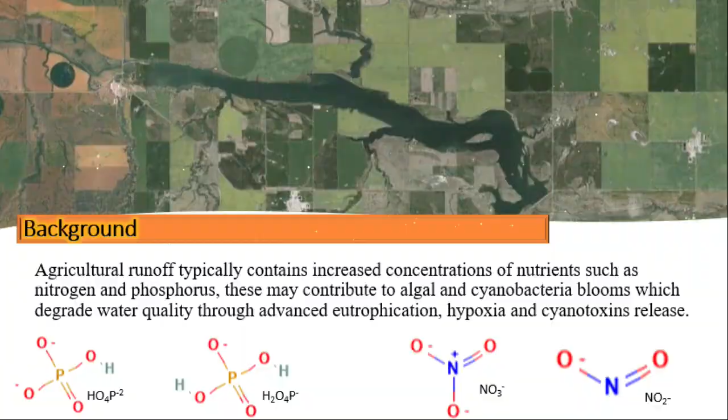A watershed that has been negatively affected by nutrient contributions includes the Gulf of Mexico Dead Zone, which is an area of hypoxic waters at the mouth of the Mississippi River. Its area varies in size, but it can cover up to 6,000 to 7,000 square miles. It occurs between the inner and mid-continental shelf in the northern Gulf of Mexico, beginning at the Mississippi River Delta and extending westward into the upper Texas coast.

It's the largest dead zone ever recorded, and I know you're all asking, how does this relate to me? I'm a farmer, or I live in the city in southern Alberta. Why is this relevant? Oh, please stay tuned.

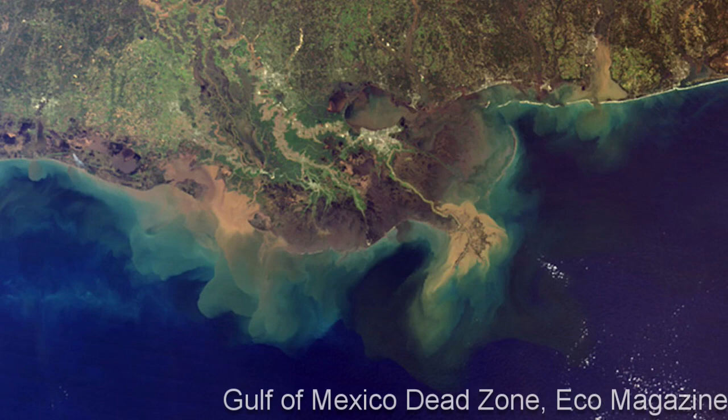Getting closer to Canada, Lake Erie is another example of a watershed that has been negatively affected by nutrient contributions. In Lake Erie, in 2014, toxic algal blooms resulted in fouled water that hundreds of thousands of people rely on for drinking, cooking, and bathing, forcing hundreds of thousands of people to rely on bottled water. Blue-green algae, or cyanobacteria, choke up huge portions of the lake and have re-emerged as an annual summertime problem after nearly disappearing for more than a decade.

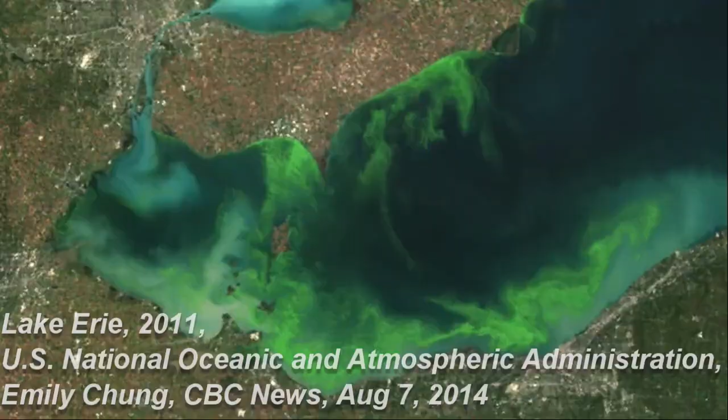And although the size of the bloom varies from year to year, in 2014, the bloom was nothing compared to the 2011 record breaker that took over a whopping 5,000 square kilometers of the lake. There is clearly a trend towards larger blooms. And I know what you're thinking, sure, that's in Canada, but that's a long ways from my farm or community in southern Alberta. How is that relevant to me?

And this is but one example of many within Alberta, as many of the reservoirs in southern Alberta are eutrophic systems. These are rich in dissolved nutrients that stimulate the growth of aquatic plant life. And decomposition of that plant life results in the depletion of dissolved oxygen, resulting in hypoxia. Some of the reservoirs can at warmer times of the year experience blooms of blue-green algae, also known as cyanobacteria.

The cyanobacteria is a naturally occurring bacterium that is found within many water bodies throughout the world. During periods of increased temperatures, large populations can develop, which release a toxin, the cyanotoxin microcystin, that can result in death by respiratory system failure or liver cirrhosis and failure. While this bloom dissipated days later, it is important that if you notice blooms of this bacteria within water bodies and water sources such as springs and water troughs, that you prevent animals and livestock from entering or consuming the water and clean out that water source.

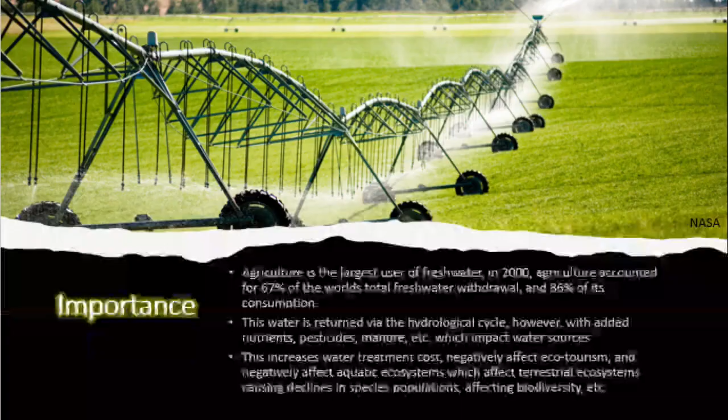It comes as no surprise that agriculture depends on fresh water. It's the largest use of fresh water in the world. In 2000, agriculture accounted for 67% of the world's total freshwater withdrawal and 86% of its consumption. This water is of course returned via the hydrological cycle, however, with added nutrients, pesticides, manure, and other pollutants, which impact water sources. This increases water treatment cost, negatively affects ecotourism and negatively affects the aquatic ecosystems, which affect terrestrial ecosystems as well, resulting in declines in species populations, affecting biodiversity, and many other effects.

There's many different beneficial management practices that can be implemented to control nutrient contributions to downstream watersheds. These include conservation tillage, crop nutrient management, pest management, conservation buffers, irrigation management, grazing management, animal feeding operations management, and erosion and sediment controls.

I know what you're thinking. I'm just a farmer or a rancher, or I own a golf course in Alberta. I don't have a lot of money to invest in new technology. And why should I spend a bunch of money to solve problems thousands of kilometers away from me? What can I do on a farm level to mitigate problems closer to me? Throughout this presentation today, I'll be discussing the phosphorus filter, which fits loosely into the animal feeding operations management and erosion and sediment control areas.

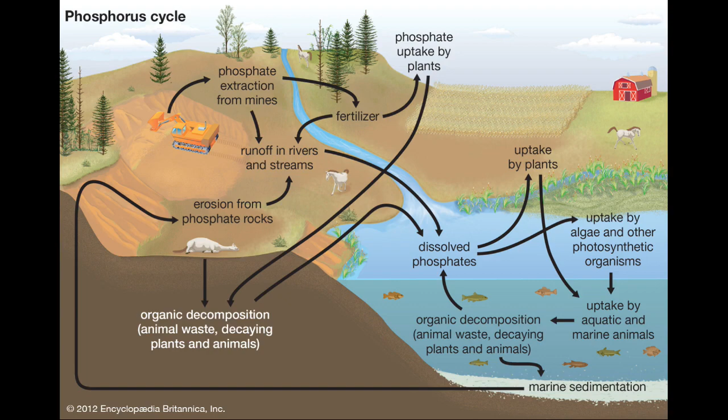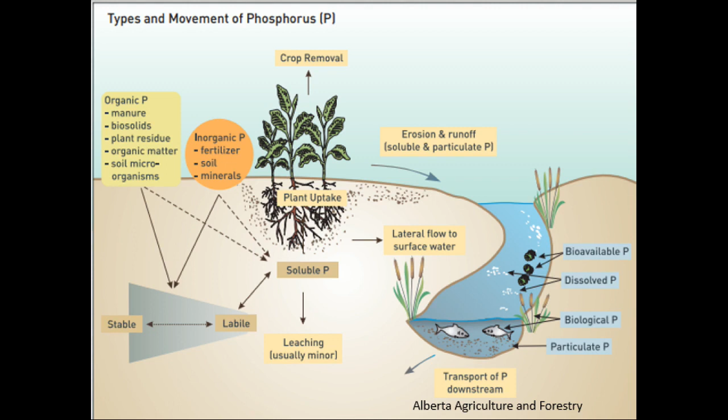In soil, not all phosphorus is the same. It can be either organic or inorganic molecules. In addition, the molecules that contain phosphorus will change in the soil through nutrient cycling. Phosphorus inputs into the soil for agricultural purposes are primarily from the application of chemical fertilizer and organic sources, such as manure. Soil phosphorus is categorized into three types: soluble phosphorus, labile phosphorus, and stable phosphorus. Throughout the presentation today, I'll be discussing the soluble phosphorus phase. Soluble phosphorus is a very small part of the total soil phosphorus, but it's a fraction taken up by plants. It can enter the surface water bodies and is biologically available and can rapidly stimulate aquatic growth.

Phosphorus moves from the landscape attached to the soil particles carried by wind or water and in dissolved forms carried by surface water runoff. Particulate phosphorus refers to all forms of phosphorus sorbed by soil particles and organic matter. Dissolved phosphorus, or DP, refers to the form of phosphorus dissolved in the surface runoff. Once mobile, phosphorus can be redeposited elsewhere on the landscape or be carried to surface water, potentially degrading water quality.

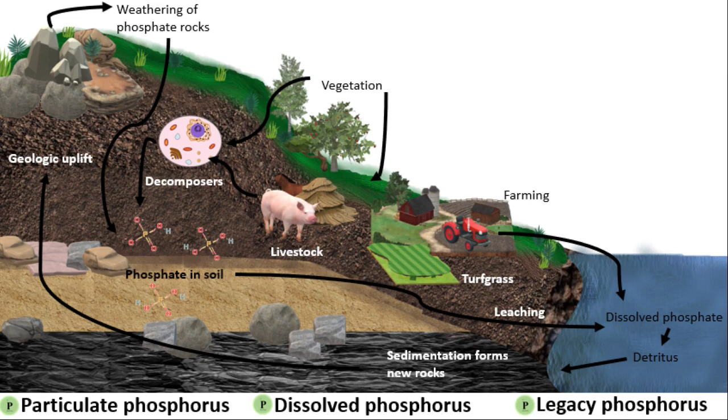Surface water runoff can transport nutrients such as phosphorus and nitrogen from livestock manure and fertilized agricultural fields into freshwater bodies. Oklahoma State University researchers have been developing phosphorus filters to effectively remove dissolved phosphorus from surface water runoff. In Alberta, most of the phosphorus is in the dissolved form, which is readily available to algae and aquatic plants, which can result in algal blooms and excessive plant growth, which both cause deterioration of water quality.

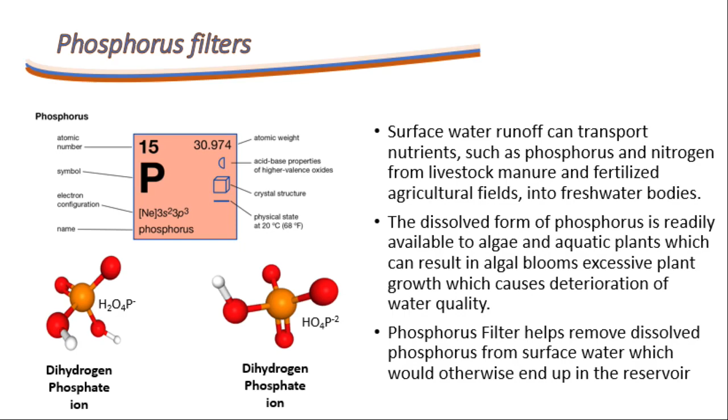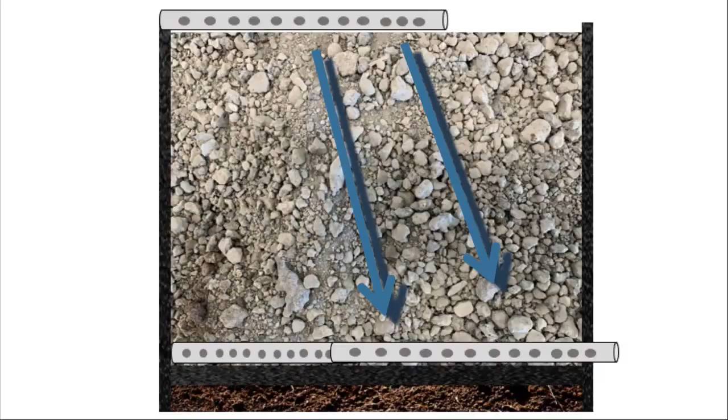The phosphorus filters are designed to use industrial byproducts such as fly ash, steel slag, red shale, and other synthetic materials such as biomass. These can be used as a filter media to capture and hold the dissolved phosphorus, thus preventing it from moving into the water body. Within the filter structure, the runoff wastewater is introduced to the filter media through perforated PVC pipes. The water flows down through the media, and the PSM binds the dissolved phosphorus, thus reducing the concentration in the water. The water flows out of the perforated PVC pipe and out of the filter system. It is important to have the filter system drain into an area that is resistant to soil erosion, such as a vegetated buffer.

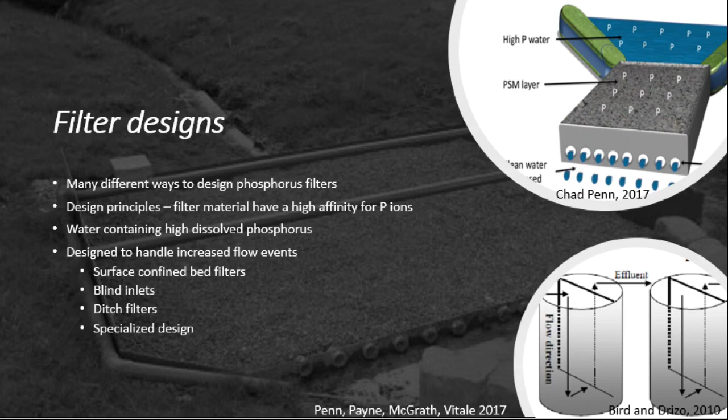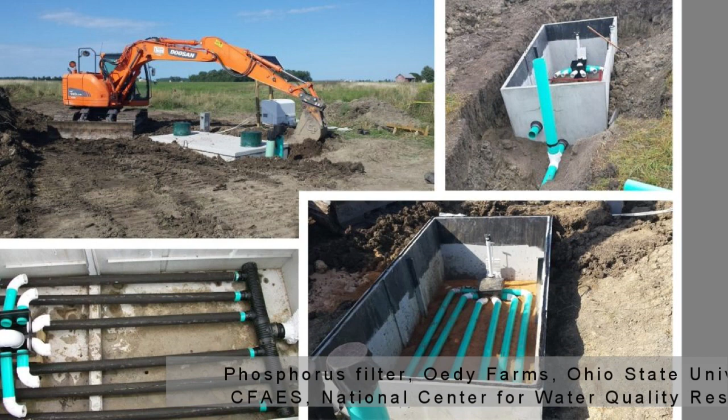There are many different filter structures that are generally specialized to meet the project objectives and site conditions. The filters are built to match the filter media that is used. And the filter must also be constructed to meet the runoff velocity and volumes for an increased precipitation event. Some of the possible filter structures include surface confined bed filters, blind inlets, ditch filters, and specialized designs such as tile drainage filter boxes, submerged cages, and membranous filter systems.

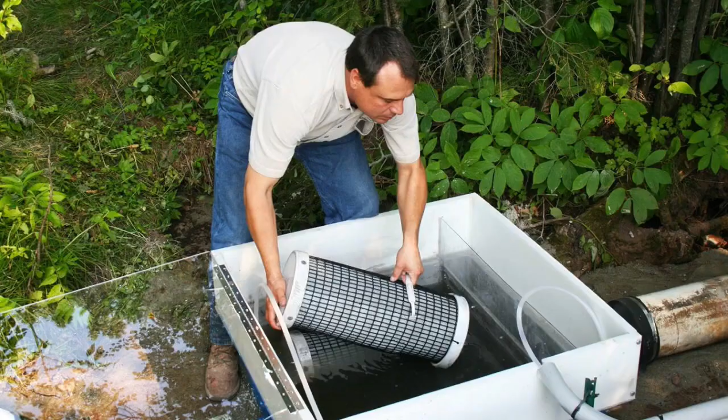In 2017, Alberta Agriculture and Forestry staff, in partnership with the County of Warner, are verifying the effectiveness of the phosphorus filter technology in Alberta through the installation of a phosphorus filter in a known nutrient-rich runoff environment. The primary purpose of this is to determine if the phosphorus filter is effective under Alberta's environmental conditions.

This site will become a demonstration site for producers and producer groups in the future to determine if the phosphorus filter technology is a cost-effective management option that can mitigate phosphorus loss and be a beneficial management practice option for landscape and production systems in Alberta.

Water sampling to date indicates phosphorus removal is approximately 95%, and the phosphorus filter is still being monitored for its filter effectiveness. It's the first filter in Canada. It's located on Tributary 4, just north of Highway 506, and it is a $70,000 project.

Project partners include the County of Warner, the OK Colony, Oklahoma State University, and of course, as mentioned, Alberta Agriculture, Environmental Stewardship Division, and Irrigation and Farm Water Division.

This project includes evaluating the effectiveness of phosphorus filter technology in Alberta and includes testing it out on a large watershed and water volumes. The purpose of this is to determine if filter material will freeze and perform in freeze-thaw effects. Water samples have continued to be taken. However, the project has since been decommissioned.

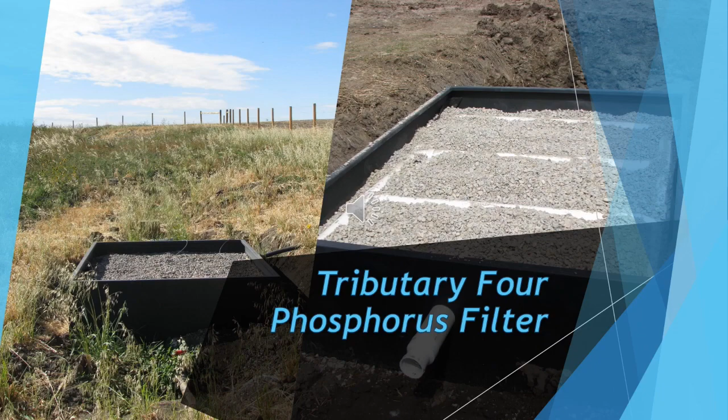This is the Tributary 4 phosphorus filter after it was installed. As you can see within the filter structure, there is a gray material. This is a gravel layer that is overlying the biomass filter material shown earlier in the presentation. The biomass material is a more expensive filter material made in Southern California. As mentioned, there are many other filter materials that can be used, such as fly ash, steel slag, and red shale.

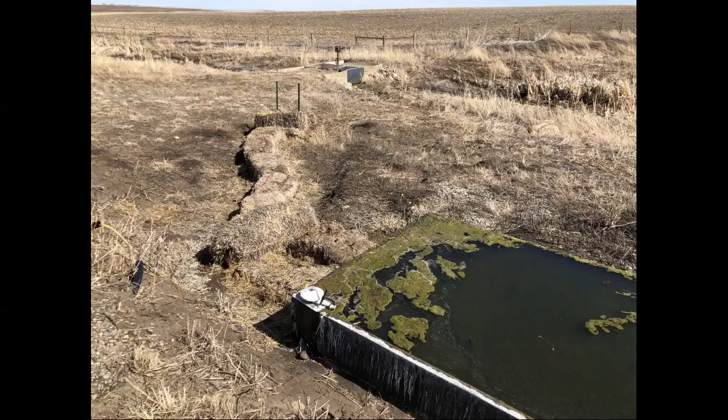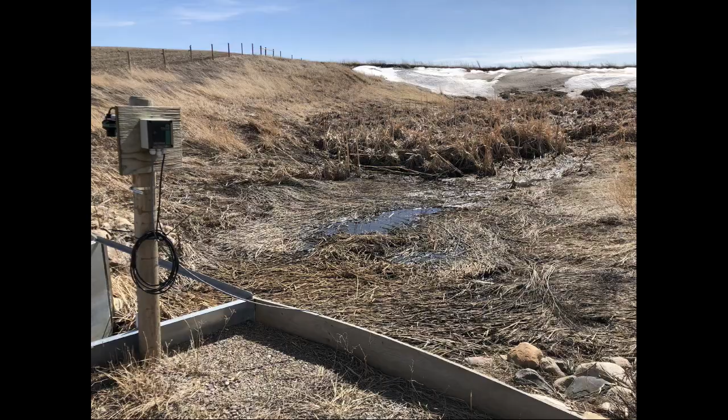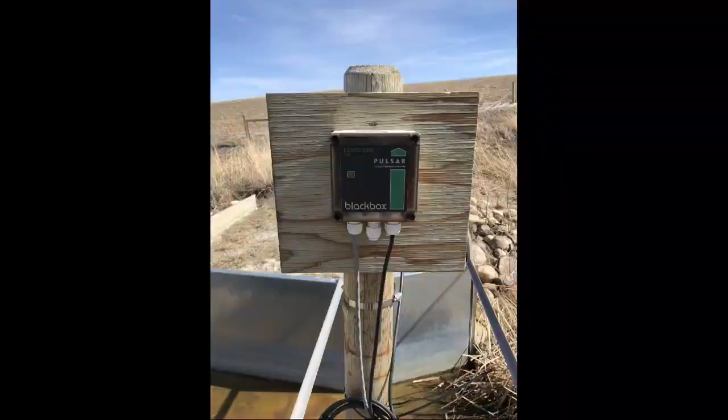The instrumentation shed, as shown, includes a weather station and ISCO water samplers that were used to collect water samples from the filter structure. The flume was used to measure the water flow from the reservoir, and the project area was fenced, and an off-site watering station was installed to provide water to livestock that are fenced in the parcel following harvest.

The lessons learned at the OK Colony Tributary 4 phosphorus filter were implemented at a second site in 2020. The purpose of this site is primarily to mitigate agricultural runoff contributions to downstream irrigation infrastructure. The agricultural runoff can contribute nutrients and fecal coliforms that degrade water quality downstream. These nutrients can also contribute to cyanobacteria blooms and excessive algal growths.

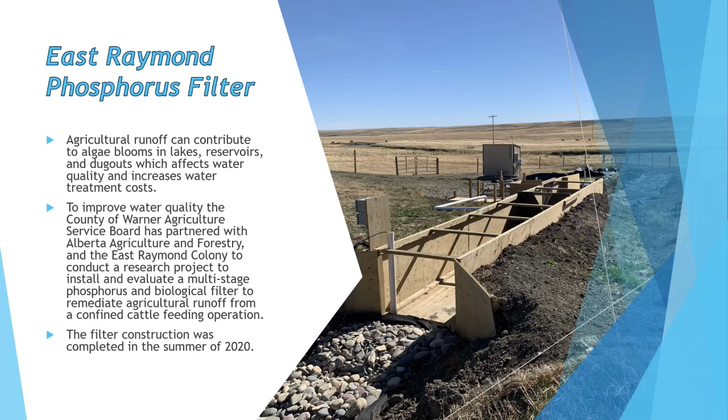To improve water quality, the County of Warner Ag Service Board partnered with Alberta Agriculture and Forestry and the East Raymond Colony to conduct a larger scale research project to install and evaluate a multi-stage phosphorus filter and bioreactor to remediate agricultural runoff from a confined cattle feeding operation.

The goal of this project is to reduce the nutrient contributions to surface water in order to improve water quality. Improving water quality within the County of Warner can decrease costs in water treatment and improve water availability to livestock, agricultural projects, and to our communities. The lessons learned in this project can be applied to other agricultural businesses, communities, and recreational facilities, such as golf courses.

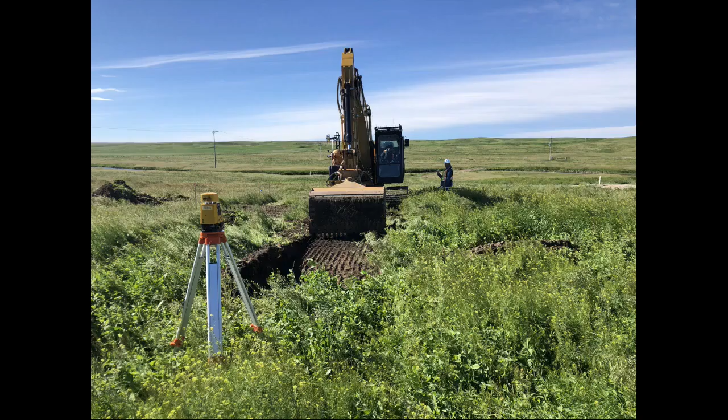In May of 2019, a drone survey was conducted of the project site by Alberta Agriculture and Forestry. This was primarily done to evaluate the changes in topography across the site and to obtain the elevations. In May of 2020, the project site was marked out with the filter site location and the location of each of the filter cells. This was conducted by Alberta Agriculture and Forestry and the County of Warner.

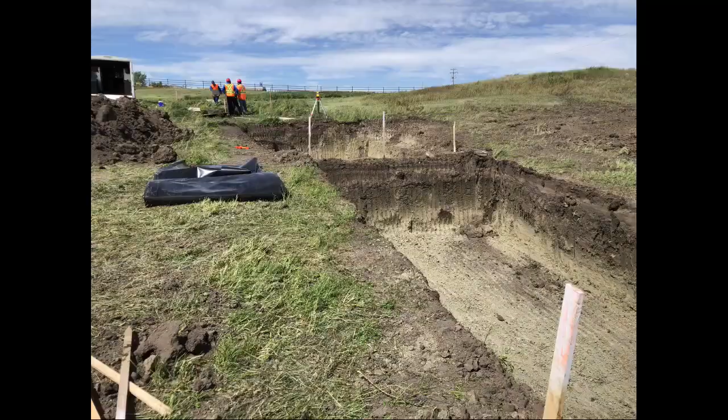On June 15th of 2020, the project construction began with the excavation of each of the filter cells, as you can see in these photographs. The phosphorus filter includes a wooden channel that diverts runoff downslope into the 3 excavations. The wooden channel was constructed to provide laminar flow into the filter structure and also to measure the water velocity flowing into the filter. The first excavation is filled with 3 different sizes of gravel, which functions as a mechanical filter, removing the coarse organics and manure from that runoff.

Water flows into a biofilter, which is a lined excavation filled with flax straw. The flax straw provides a carbon source and a home to denitrifying bacteria, which consume the nitrogen from the runoff. This bacteria will decrease the nitrogen concentration in the runoff, and as the filter fills with water, it will flow into a third excavation that is filled with metal slag.

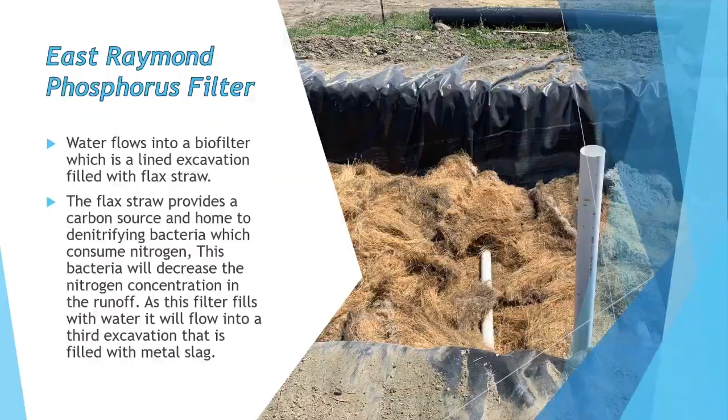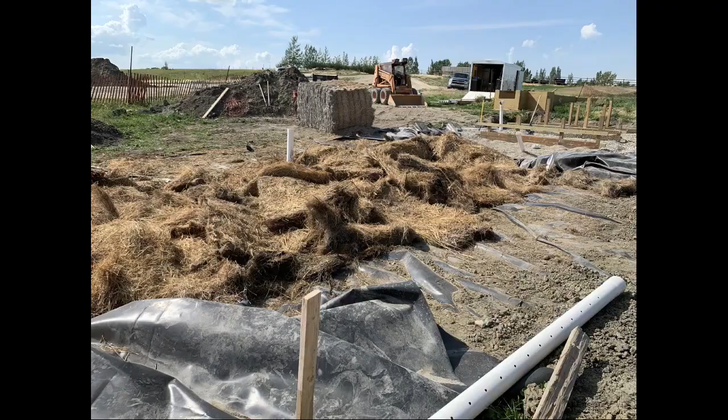The flax straw selected for the phosphorus filter was chosen because of its availability and for the physical properties of the straw. Flax is generally resistant to microbial decomposition, however does not last as long as wood chips. There's many different bioreactor materials you can select from, such as cereal straw from wheat, durum, or barley, wood chips, coconut fiber, and hemp straw. These options all vary in their physical properties. However, it makes sense to use a filter type that is local, inexpensive, and meets your project needs. Alberta Agriculture and Forestry has done quite a bit of work in comparing the various bioreactor materials available in the province.

The primary purpose of the filter material is to provide a carbon source for denitrifying heterotrophic bacteria, which use the cellular structure of the filter material as an energy source. Once introduced into the aquatic environment, nitrogen can exist in several forms, such as dissolved nitrogen gas, N2, ammonia, NH3 and NH4+, nitrite, NO2-, nitrate, NO3-, and organic nitrogen as protein matter, or in dissolved or particulate phases.

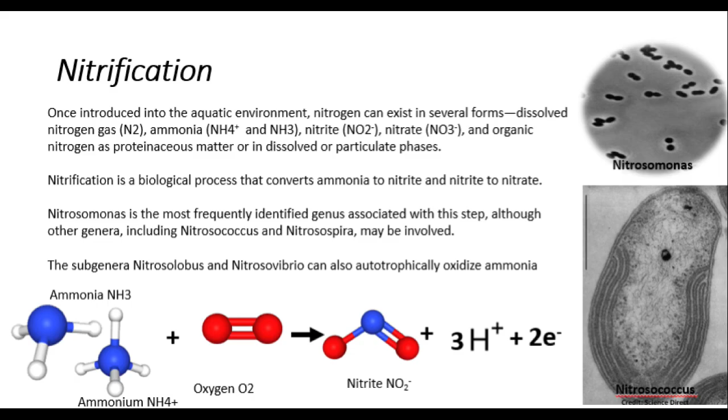Water was introduced into the filter structure bioreactor following construction. With that water, a population of bacteria, protists, and fungi were introduced. Within the filter structure, bacteria got right to work, consuming the available nutrients and using that as an energy source for growth and reproduction. Bacteria such as Nitrosomonas, Nitrosococcus, Nitrosospira began a biological process of nitrification within the filter. The process involves the conversion of ammonia to nitrite and nitrite to nitrate.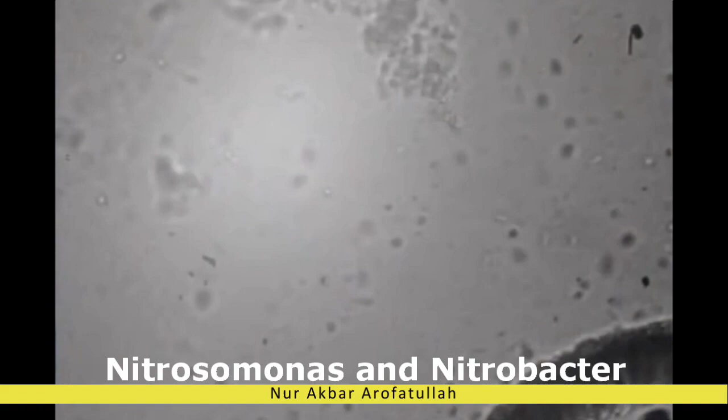In the second step of the nitrification process, nitrite-oxidizing bacteria oxidize nitrite to nitrate. Nitrobacter is the genus most frequently associated with this second step, although other genera, such as Nitrospina, Nitrococcus, and Nitrospira, can also autotrophically oxidize nitrite.

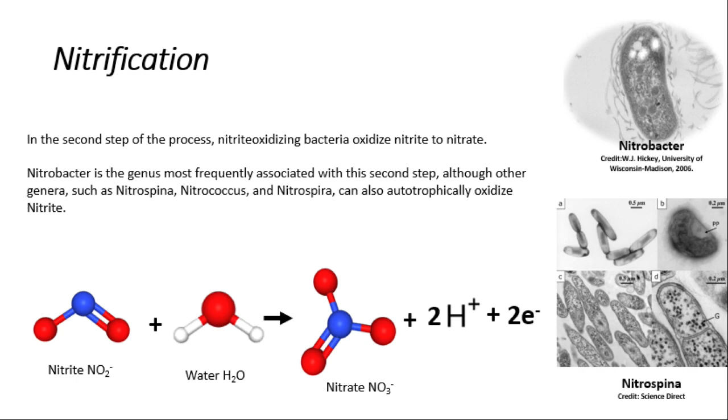Denitrification is the process by which nitrates are reduced to gaseous nitrogen by facultative anaerobes. These facultative anaerobes flourish in anoxic conditions as they use nitrate in place of oxygen as an electron acceptor when they are metabolizing carbon substrates. The biological process of denitrification involves reduction of nitrate nitrogen to nitrogen gas, but may also include nitrous oxide, N2O, or nitric oxide, NO. Gaseous nitrogen is not readily available for biological growth. Thus, denitrification converts nitrogen to a harmless form that has no significant effect on the environment.

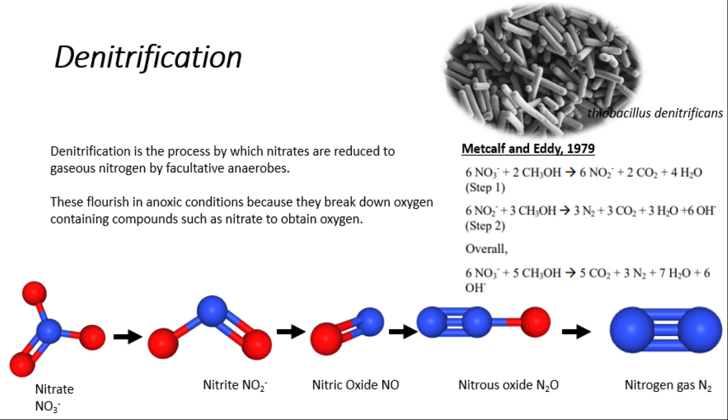The principal biochemical pathways, however, are not anaerobic, but are merely minor modifications of aerobic biochemical pathways. Denitrification is a two-step process in which the first step is the conversion of nitrate into nitrite. The second step involves nitrite through two intermediates to nitrogen gas. Denitrification is considered a heterotrophic process conducted by microorganisms that require reduced organic substrate for energy and cell synthesis.

The denitrifying heterotrophic bacteria convert the available nitrates from the agricultural runoff into free atmospheric nitrogen and use the energy from that for growth and reproduction. There are a number of different bacterial species that can perform this biological process, and a carbon source must be available for the process to occur. The flax filter material would serve that purpose.

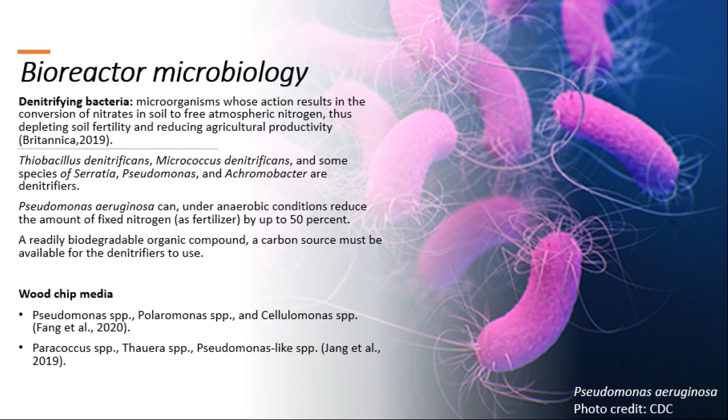Something to note is that denitrifying bacteria are generally more difficult to cultivate than nitrifying bacteria, and you have to be careful not to flush them out of the system. The third excavation is filled with metal slag, and that metal slag is about 50% calcium oxide, 40% iron oxide, and 10% silicon oxide, with trace amounts of magnesium, manganese, and sulfur. The metal slag will bind with dissolved phosphorus and decrease the phosphorus concentration in the runoff.

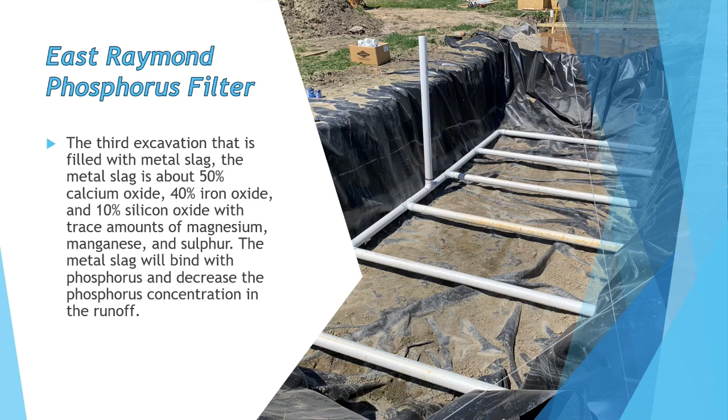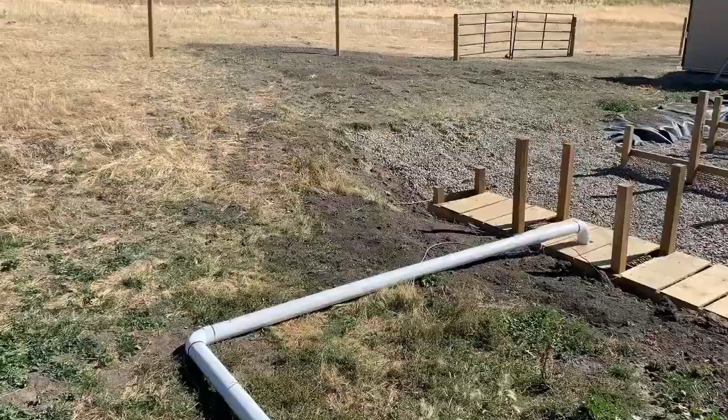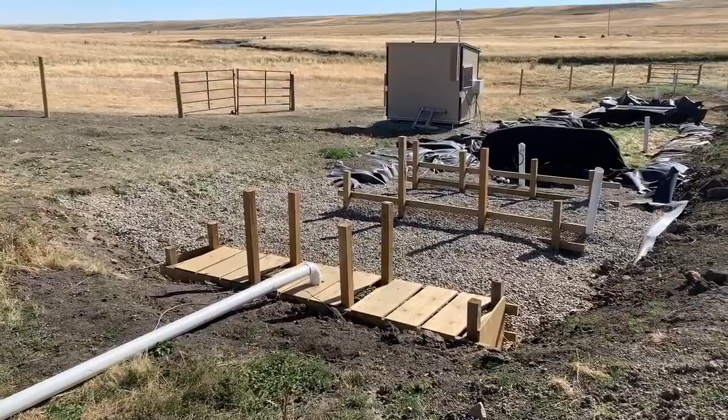This video shows a landscape shot of the project site. You can see the wooden channel and cobble overflow channel, which will be used to divert increased runoff amounts should we encounter a drastic precipitation event. The PVC pipe shown near the channel will divert water from the wooden channel into the filter. Within that channel, two weirs are present, as shown.

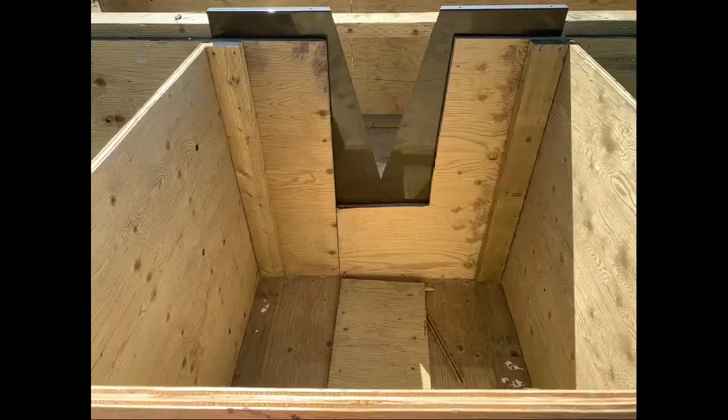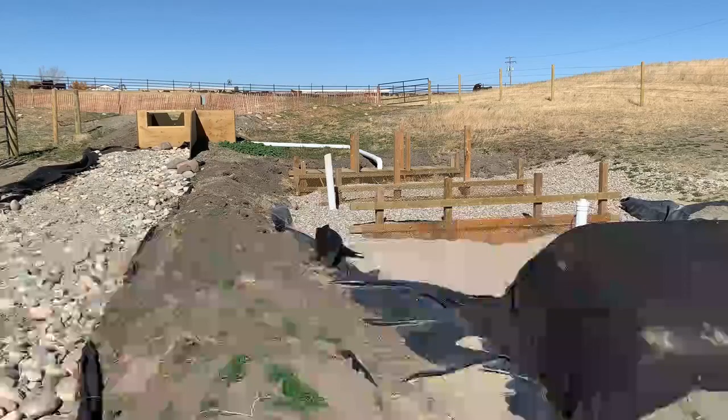The water flows over those weirs and into the pipe, which flows into the gravel filter. Connecting the gravel filter to the bioreactor is a PVC pipe. As water fills the gravel filter, it flows into the bioreactor. The large black object shown is a flax bale covered in geotechnical fabric that is used to stabilize the boundary between the gravel and bioreactor, which was weakened during the rain events after the excavation.

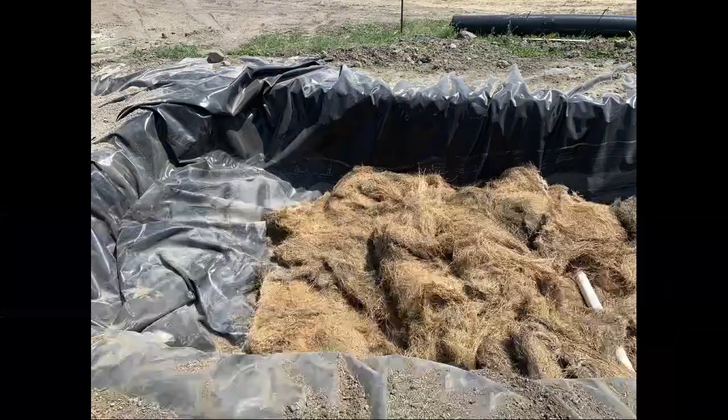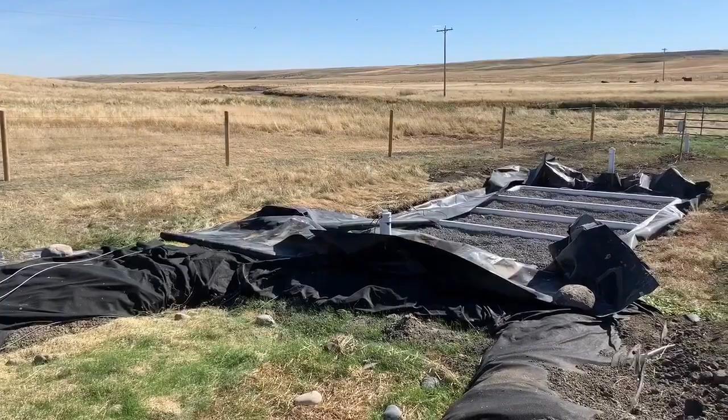The bioreactor was filled with flax and covered with a geotechnical fabric and topsoil overburden to insulate the filter. As expected, there was settling of the filter material. The bioreactor has averaged 4 degrees Celsius over the winter, even on the night of February 12th, in which the atmospheric temperature was minus 35 degrees Celsius. The flax will degrade over time and may require recharge through the addition of more flax straw. The topsoil was seeded to a grass mix and covered, as were the berms used to collect runoff, as shown.

The instrument shed houses the wiring for the flow sensors and temperature probes. It also houses 2 autosamplers. The solar panels provide current to passively recharge 2 12-volt batteries within the shed, which power the ISCO water samplers. Now you may think that the exposed wires on the site are disorganized, but in reality, if you place these within steel conduit, mice tend to chew the wires.

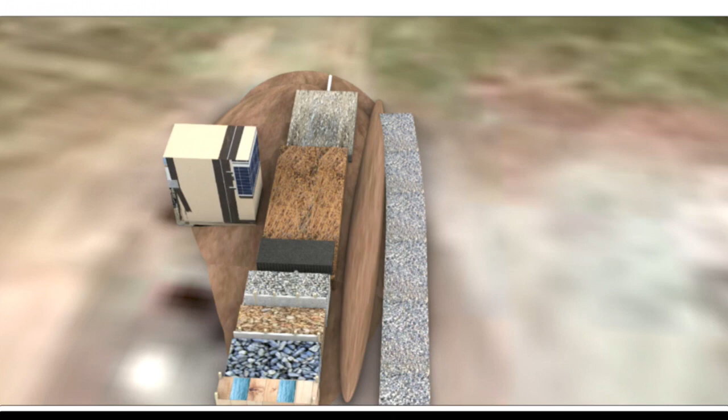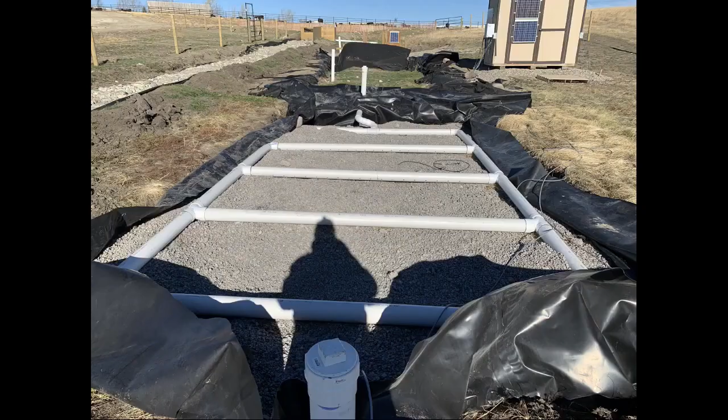The vertical PVC pipes sticking out of the filter structures provide an access point for the temperature sensors and permit the direct sampling of water from the filters. These ports will also allow the introduction of water to flush out the filter if needed. The site must be fenced to prevent cattle damage, and the phosphorus filter, which is visible, has a PVC distribution network, which allows the water which flows into the filter to be evenly applied to the slag material to increase adsorption of the dissolved phosphorus. From the phosphorus filter, the water flows downslope through a pipe and away from the filter.

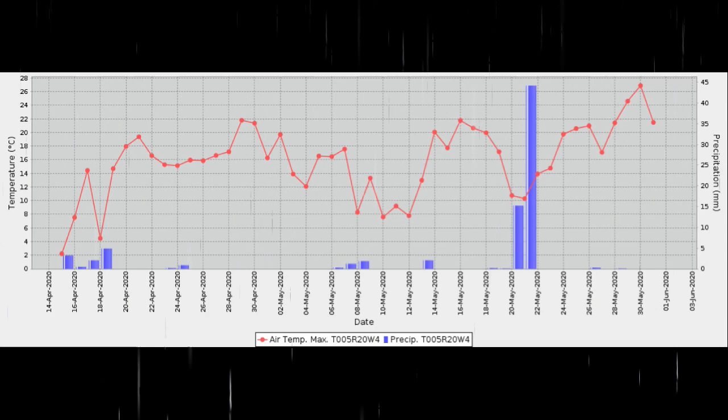This year within the county was unusually wet. In the spring and early summer, we received increased precipitation. Most notably was May 21st, in which 15 millimeters fell, followed by an additional 43 millimeters. This saturated the confined feeding pens, and there was runoff downslope through the filter project area and off-site to the east. This flashy precipitation event really demonstrated the need for a mitigation option, such as a filter at the site.

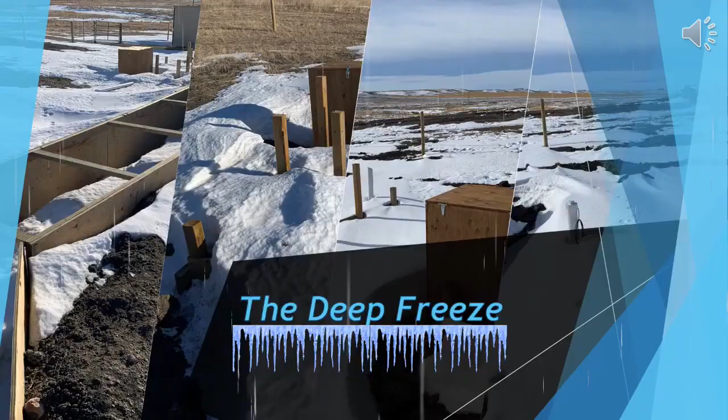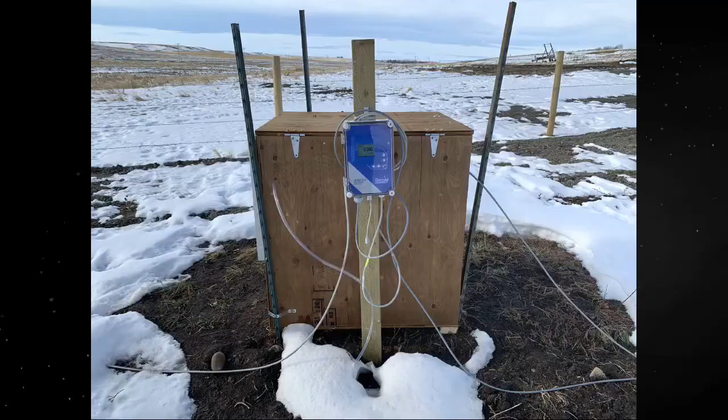Precipitation caused delays throughout the construction process, as shortly after beginning to excavate, on June 15th, consistent rains from June 16th to July 1st routinely saturated the site and caused subsidence issues with the excavations. Which brings us to the primary reason in which we installed this phosphorus filter in southern Alberta: snowfall and sub-zero temperatures. The primary reason this was installed was to evaluate its performance with the freeze-thaw cycles to see if this is a viable means of removing dissolved phosphorus from agricultural runoff in southern Alberta.

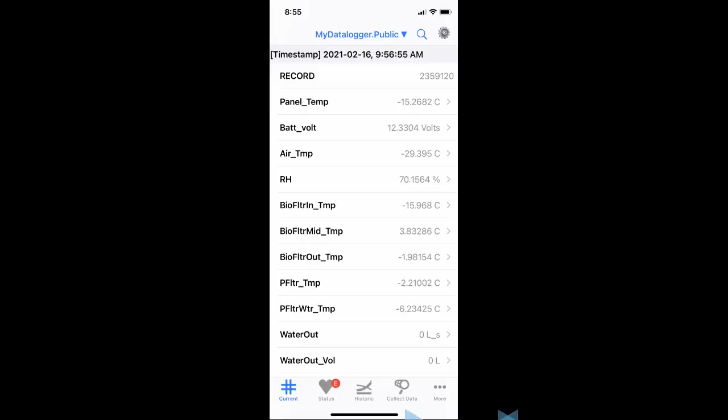Throughout this project, I had the pleasure of working with Ken Jansen, a technological expert who worked extremely hard to make the project a success. He set up the sensors at the site to be accessible through an iPhone app called LoggerLink, as shown in the figures. Through this app, a person can access the sensors at the site to obtain a real-time measurement of the site conditions, including the temperatures of the panel, the filter cells, air temperature, relative humidity, and a water velocity measurement of the flow sensors. As well, you can obtain the status of the ISCO samplers.

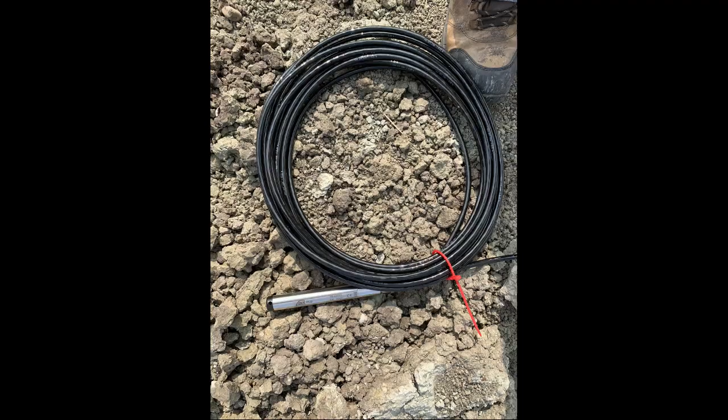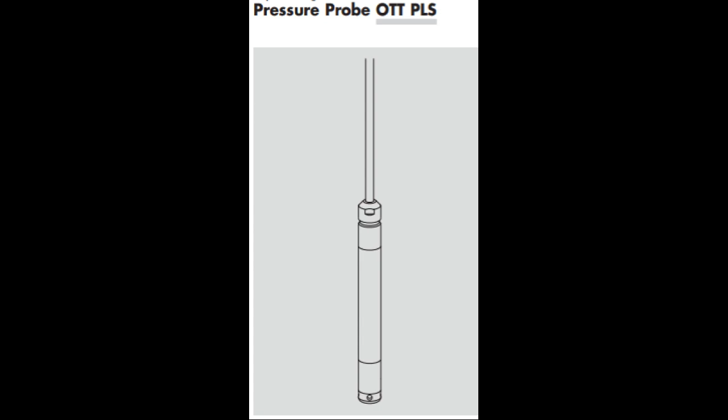The iPhone app connects to a number of temperature sensors which extend down into each of the filter cells. It also connects to a pressure probe, an OTT PLS pressure transducer. This device is used for precisely measuring the water level of ground and surface waters through use of hydrostatic pressure of the water column above a relative pressure measuring cell. A pressure compensation capillary in the pressure probe cable gives the measuring cell the current ambient air pressure as a reference. This device was mounted within the entrance of the wooden channel.

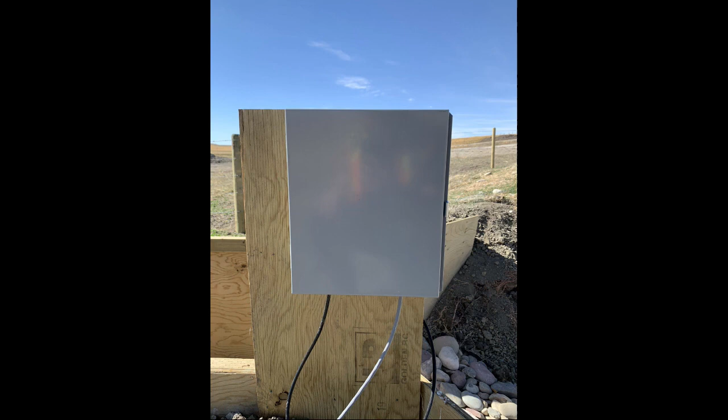This pressure transducer will detect water flowing into the channel and send a signal to the app. This is an enclosed sensor that vents through an external interface that is located in the enclosed steel box. The device is manufactured by Campbell Scientific. The device used for measuring the flow of water out of the phosphorus filter is the Greyline Instruments Area Velocity Flow Meter Model AVFM 5.0.

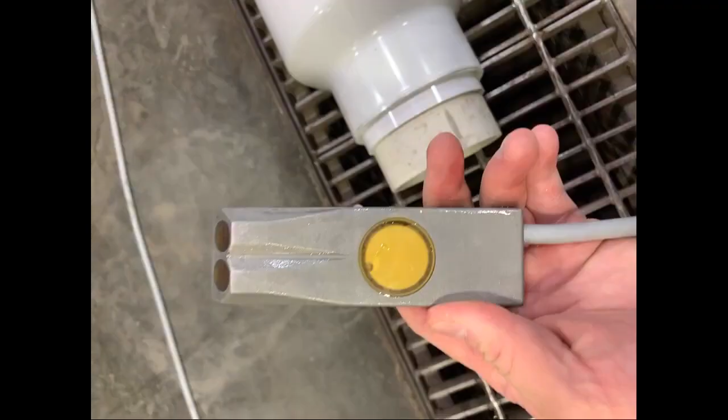The device uses a submerged ultrasonic sensor to continuously measure both velocity and level in the pipe. The sensor resists fouling and corrosion. And the flow meter can be configured with the standard submerged velocity level sensor or with the submerged velocity plus a separate non-contacting ultrasonic level sensor. The QZ02L sensor was used in our circumstance.

For the producers in the audience that are looking to implement a phosphorus management strategy, the Alberta Phosphorus Management Tool is a risk assessment tool designed to help producers make livestock and nutrient management decisions that will minimize environmental risk associated with loss of phosphorus and to maximize the benefits of manure and fertilizer nutrients. It also serves as an educational tool to explain how management practices and landscape features impact phosphorus loss, and which beneficial management practices can be used to mitigate that loss. This risk assessment tool helps farmers plan their on-farm phosphorus management. It's a Windows-based program developed by the Government of Alberta as part of the Alberta Phosphorus Watershed Project.

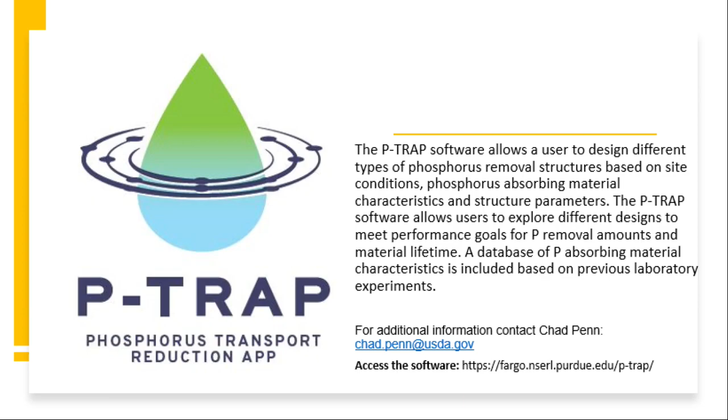I'm sure throughout this presentation you've noticed Chad Penn's name a few times. His team at the USDA has developed P-TRAP, or Phosphorus Transport Reduction App, which allows a user to design different types of phosphorus removal structures based on site conditions, phosphorus sorbing material characteristics, and structure parameters. The P-TRAP software allows users to explore different designs to meet performance goals for P removal amounts and material lifetime. It has a database of P sorbing material characteristics based on previously completed laboratory experiments. I encourage you to check out the software, it's quite interesting.